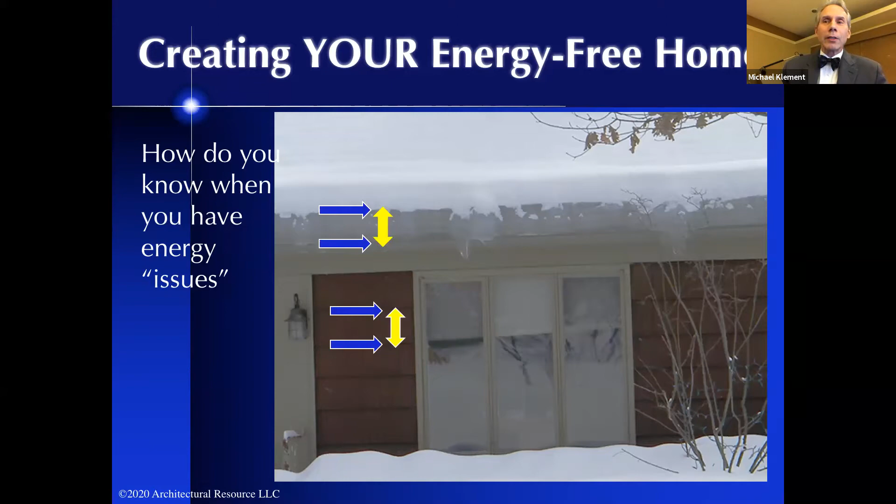Those striations are seamed at 12 inches. That means that that ice dam is taller than 12 inches. That's a clue that you might be having energy issues. This is also a clue that you might have infiltration issues.

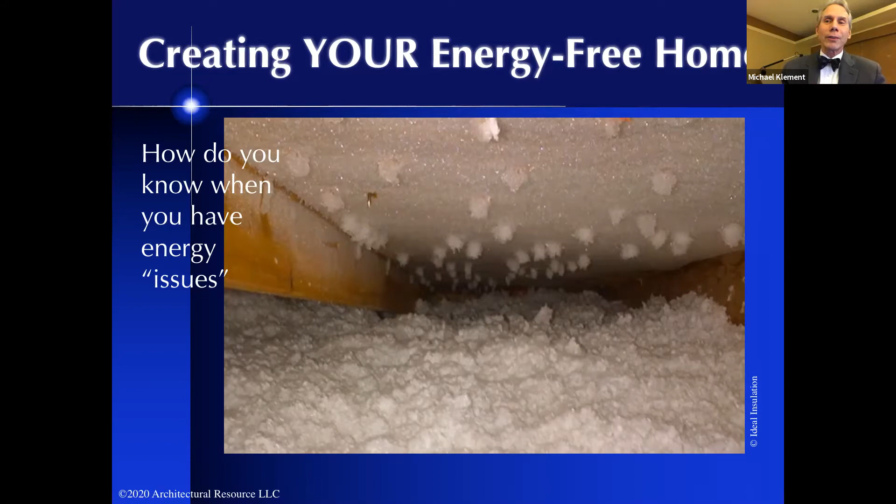This is also a clue when you climb up into your attic in the middle of winter and you're not sure which side is up and which side is down because the frost looks an awful lot like the powdery white insulation, the loose fill fiberglass. That's an indication, but how you really know is when there's not even bad weather and you're seeing things like this that resulted from what happened last winter. And the final check is, of course, your energy bills.

So where do you start? Here's where you start. Tonight, we're going to be laying out the path to a net zero home. And it starts with CUG: conservation, utilization, and generation. We're going to be looking at those in that order because that is the sequence. The most important thing is to make sure that you manage in this sequence. Otherwise, you're going to be throwing good money after bad. So let's have a brief conversation here on the fundamentals of energy so we have common ground together, all right?

So, temperature. Basically, temperature is vibrational kinetic energy, the motion of molecules. And what you'll hear discussed in a lot of energy conversations is something called delta T, the difference between the temperature inside the envelope and outside the envelope. We move quickly from temperature to conversations about humidity. Humidity is the content of moisture in the air, measured in grains of moisture. There's absolute humidity and relative humidity. It's important to know the difference between these two.

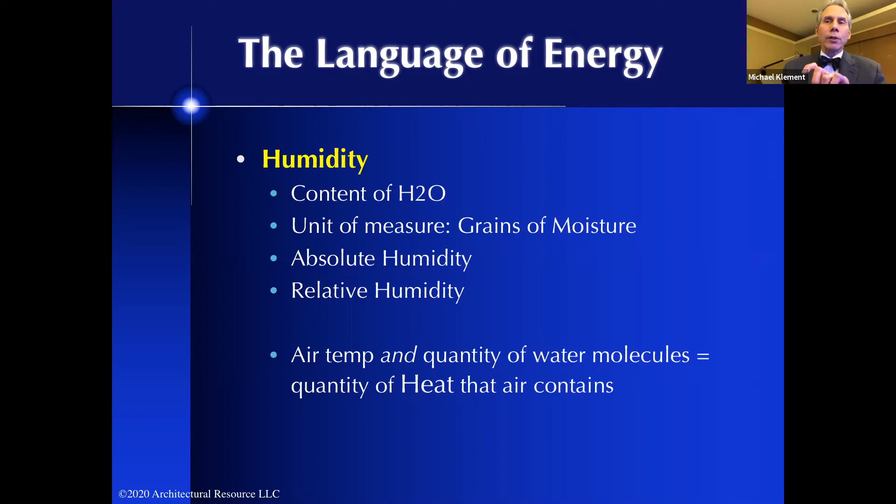Temperature is how — I just went backwards. Hang on a second.

There always has to be a little technical stuff going on, otherwise it's not a Zoom meeting, right? We're learning that. Heat.

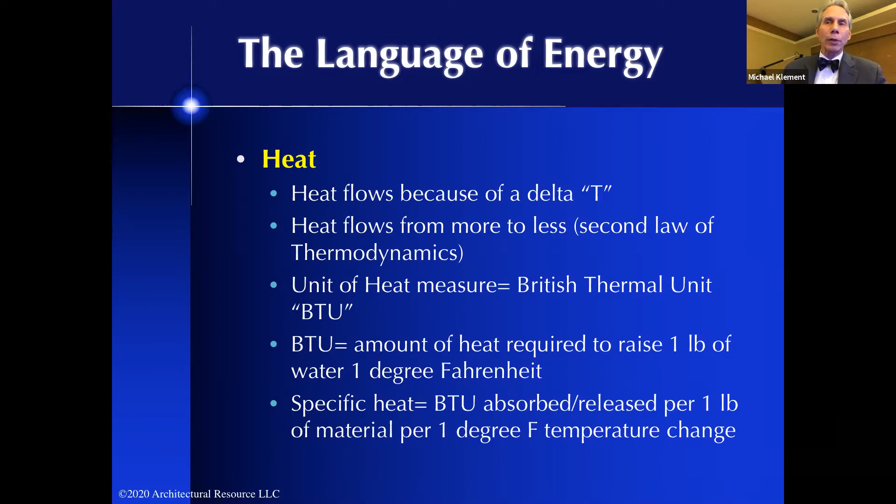Heat flows because of a delta in the temperature, more to less. So I often ask this question of people: heat goes up, right? We think about how, if you're inside your house on the second floor in the wintertime, the heat's going up. Well, heat doesn't go up, buoyant air goes up. Heat moves from more to less. And it's important to keep that in mind, because when we're creating a net zero energy free home, we're being completely on top of the heat flows through the building. It's a very, very important feature.

A BTU, or a British thermal unit, is a measure of energy, and that's essentially one blue tip kitchen match. It's what it takes to move the temperature of 1 pound of water 1 degree Fahrenheit.

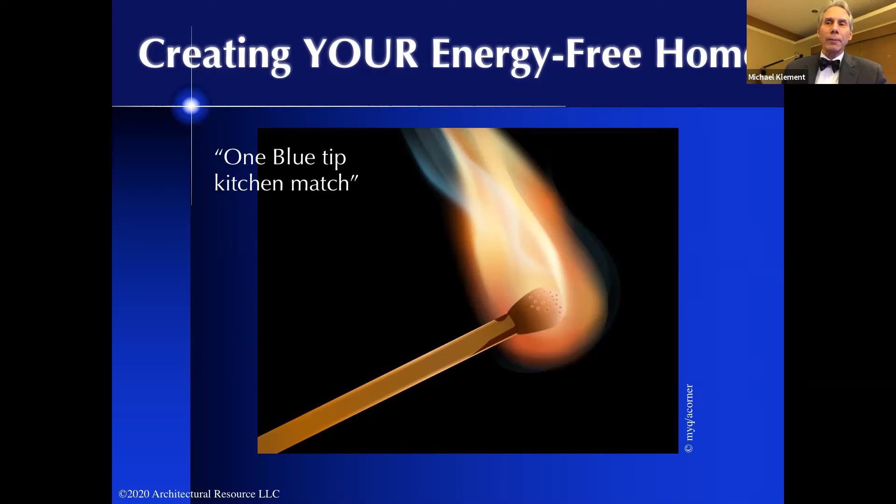All right, so things are going to be giving me fits tonight. I'm going to just do this.

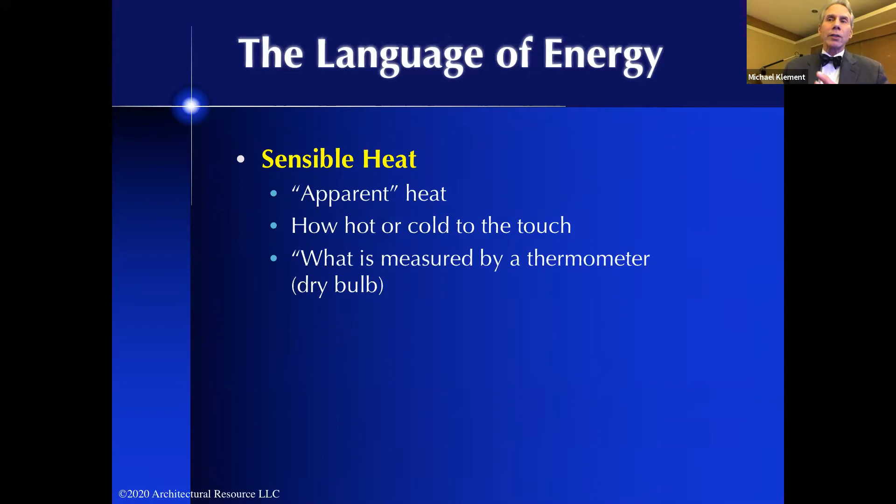Heat has two aspects. Sensible heat, this is the apparent heat. This is how hot or cold something is to the touch. This is what you measure by a thermometer, dry bulb. But there's another aspect of heat which is very important in terms of building performance, and that's latent heat, or hidden heat. This is what we think about when we have what we call phase change material. So when we have something going from a liquid to a gas, there's energy that needs to be absorbed to make that happen. The same thing happens when it goes the other direction.

I want to get into a brief conversation of energy versus power. Energy is the capacity of something to do work, and energy can exist in many different forms. We're going to be talking in particular about heat energy and electrical energy. Heat energy is measured, as we mentioned earlier, in BTUs, or British thermal units. Electrical energy is measured in kilowatt hours, and that's the expenditure of 1 kilowatt across 1 hour.

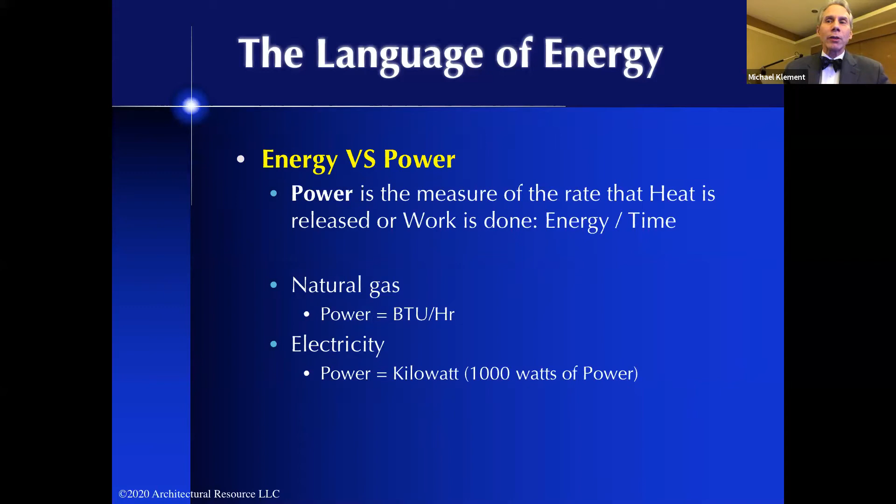To get it even more confusing, power is a measure of the rate at which heat is released or work is done. So in natural gas, we look at BTUs per hour. In electricity, we look at kilowatts.

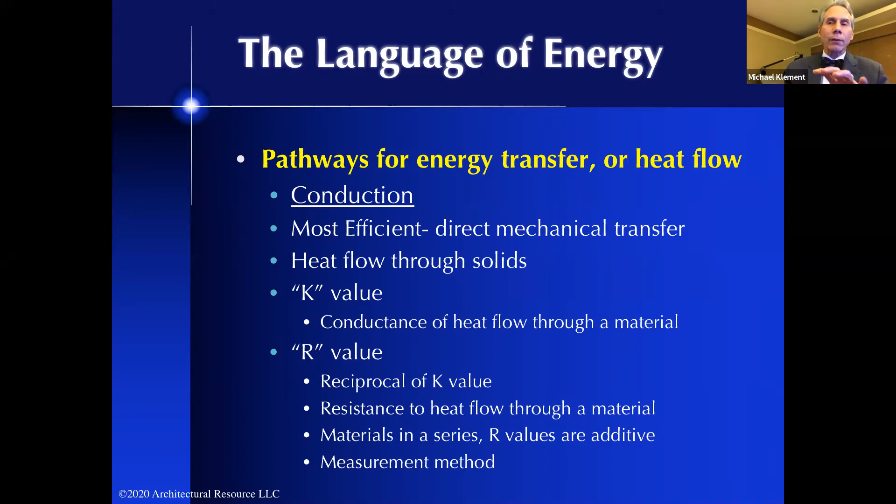Now we want to tackle the pathways for energy that moves across the building envelope, or heat flow. There are three principal methods we're going to be looking at. One is conduction. Conduction is a mechanical transfer of energy. It's heat flow through a material directly to another. We look at either K, the conductance of heat flow, or R, the resistance to heat flow. A higher R value has a higher resistance to heat flow, and that's a good thing. When you make your breakfast, if you're frying an egg, that's a perfect example of conduction. From the pan, the heat is being conducted directly into the egg, causing it to fry.

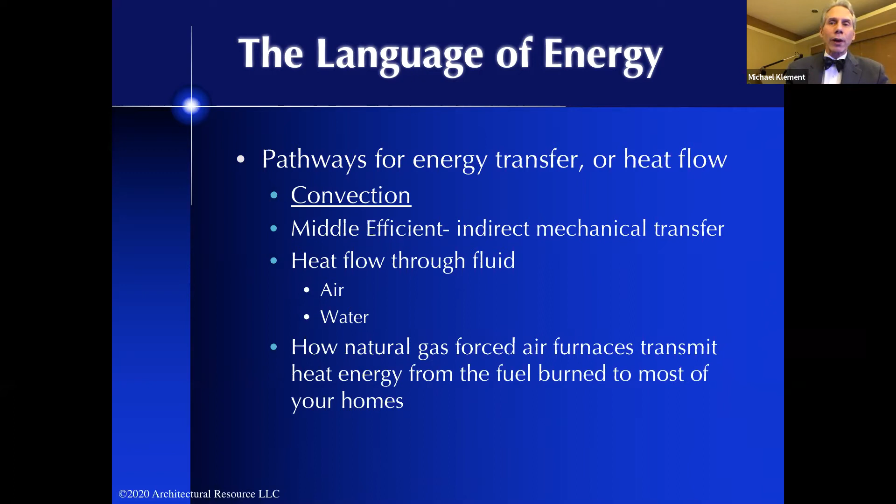The next measure of energy transfer is convection. This is the middle efficiency energy flow, through fluid transfer, air and water. If you're having that same egg for breakfast and now you're blowing on your coffee, you are using convection as a way of cooling that material.

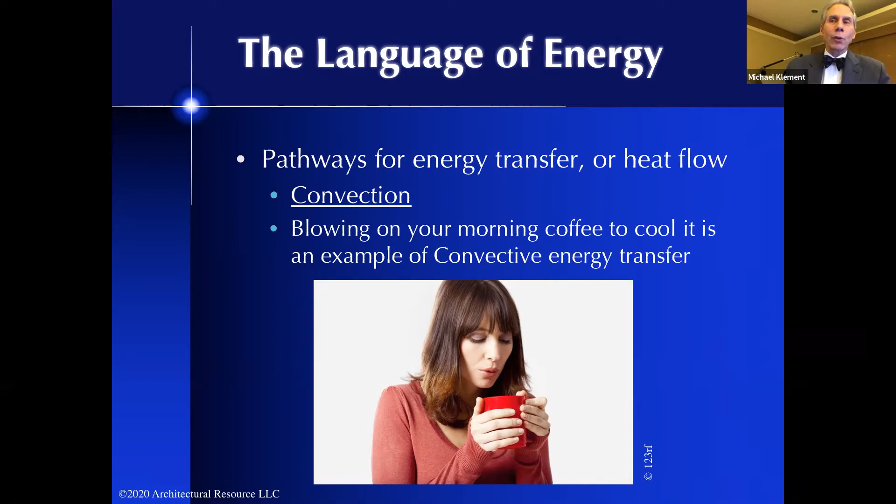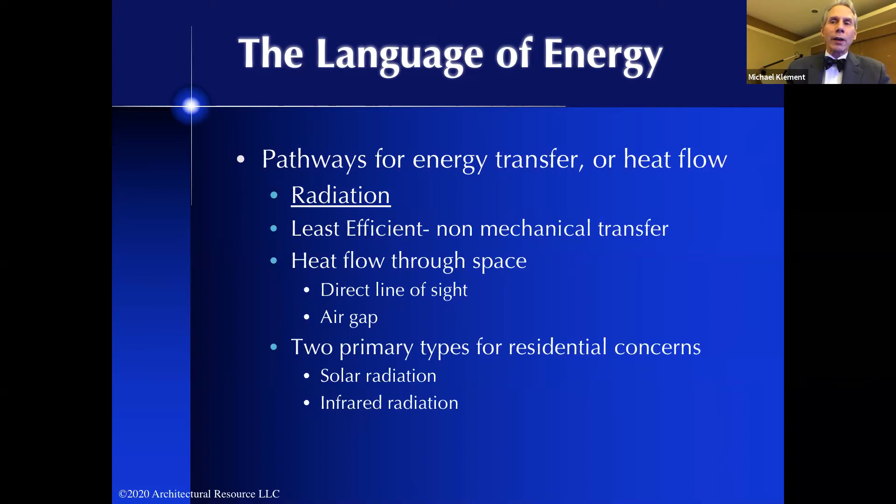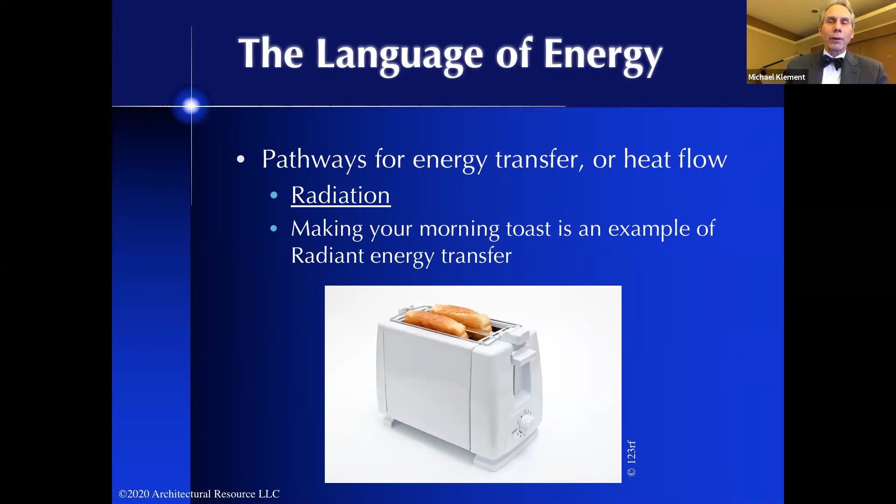Last but not least is radiation. This is the least efficient. This is heat flow in a direct line of sight through space. In our residential concerns, there are two particular concerns we look at: solar radiation and infrared radiation. So while you're busy eating those eggs and drinking your coffee, you also have a great illustration of radiation, because that's how you made your toast this morning, if you should happen to. So breakfast is a science experiment. Who knew, right?

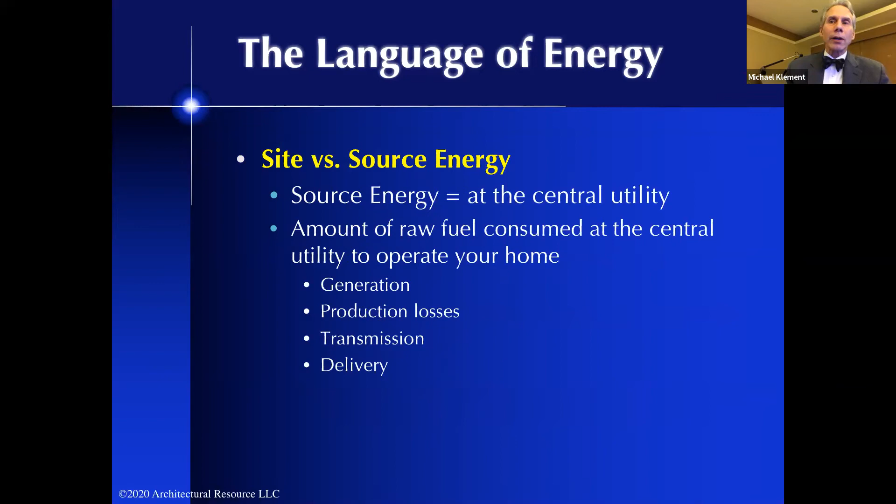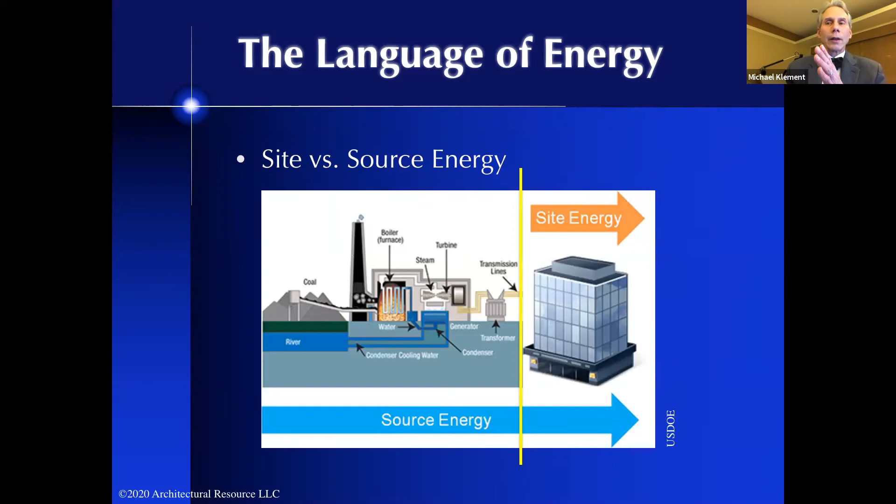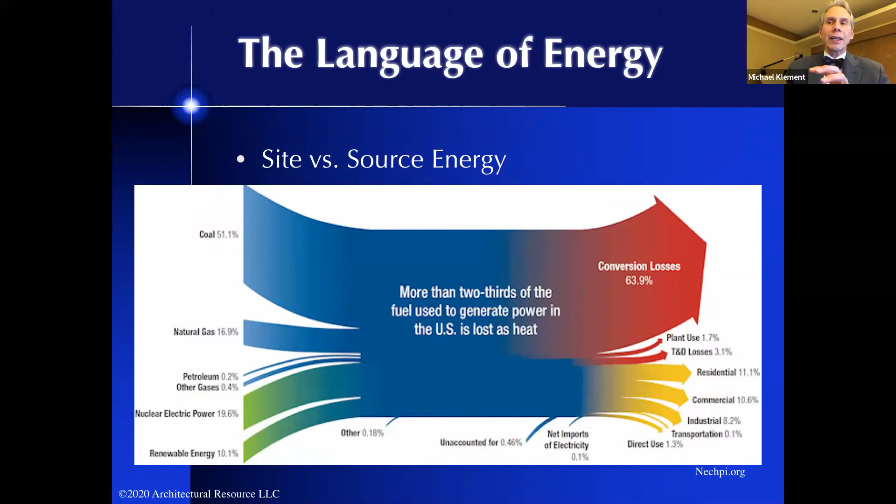So we're going to move now to talking about energy. There's a conversation in this field called site versus source. Source energy is what is consumed at the power plant to generate the power that comes to your house. Site energy is the energy that's used at the site. There is a big difference. When people talk about net zero energy, we have to discern whether they're talking about source energy or site energy. In this country, more than two-thirds of the power we're using is lost as heat before it even gets to us. That's like having your car derated by 30%.

Another concept we want you to understand is energy use intensity. This is a way to make a metric that can compare any particular building at any different size. We basically look at the BTUs per square foot per year. A typical home has an EUI of, call it 68. A passive house, which we'll talk about in part two of this two-part series on creating an energy-free home, has an insanely low energy use intensity of roughly 12 and lower.

Now we're going to be moving into those three steps that we talked about to conserve energy: conservation, utilization, and generation. We're going to focus first tonight on conservation. We'll pick up utilization and generation at the next event, part two. These are the four aspects: human behavior, design, air sealing, and insulation. Human behavior — what are we talking about? This is America's weapon of mass destruction.

One of our good friends, Marc Rosenbaum, who's one of the leading experts in energy management, is fond of saying there are no net zero homes, there are net zero households. Our behavior and how we operate in our homes has a huge amount to do with how efficient our home could be. You could have a super energy efficient home and drive it into the ground and lose some of those efficiencies we're baking in there.

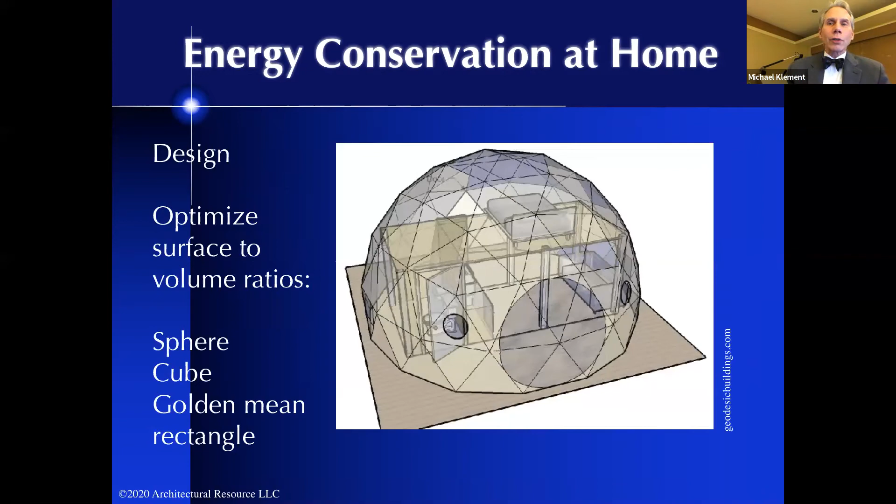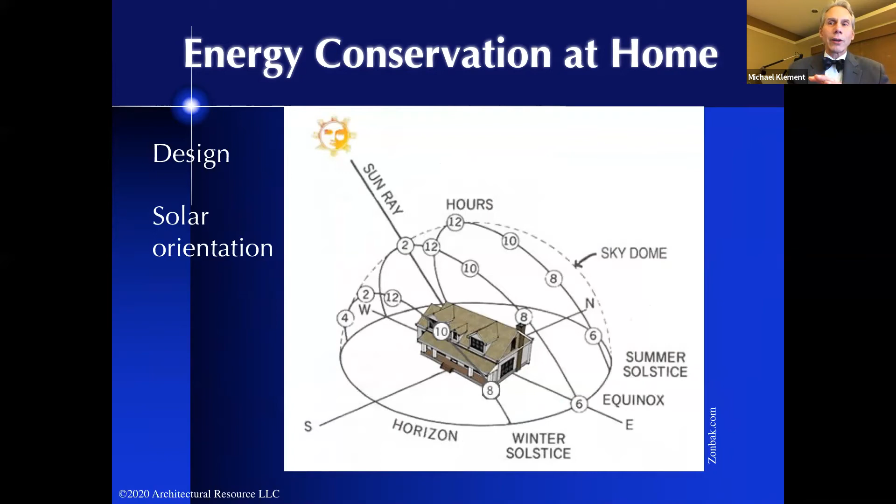What we're also looking at is optimizing the surface to volume ratio. We want to try to minimize that surface area. We also want to look at the solar orientation, because the sun's energy is free energy we can take advantage of. Once we've done human behavior and design, we now look to air sealing.

Air sealing, if you notice on that list, comes before insulation. This is like having a parka, but having it unzipped. Like we see a lot of students walking around campus with these great parkas, unzipped.

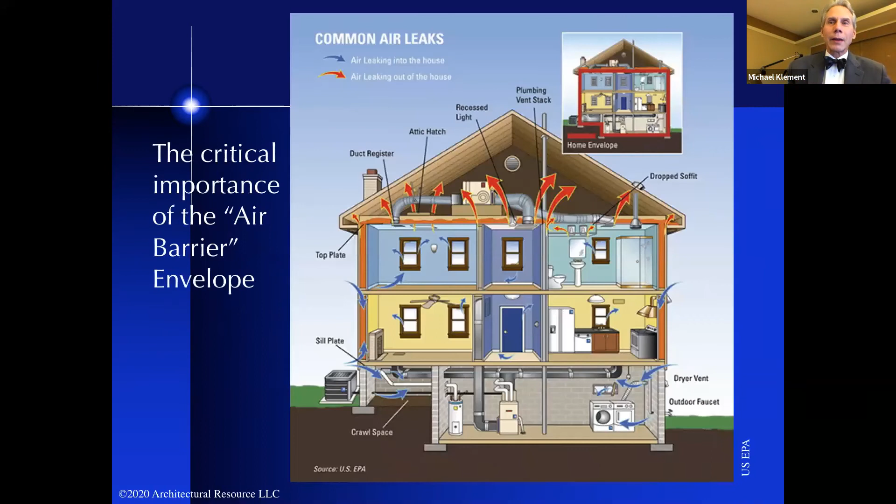They've got a convection energy issue going on. This is something we call the air barrier, and this is what separates the inside of the home from the exterior of the home. Air sealing becomes super, super important.

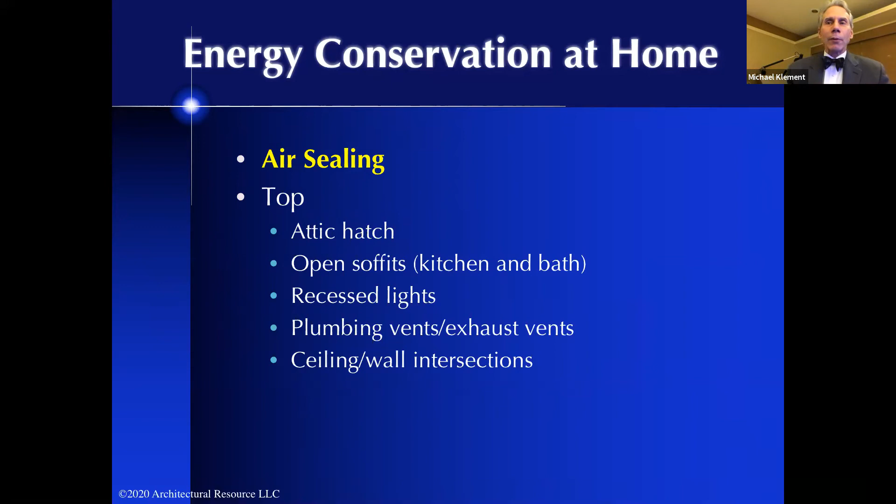What we look at is the 3 pressure zones of the house: the top, the bottom, and the middle. We want to seal these to prevent air from leaking up into the attic. Remember how we said that warm, buoyant air moves up? Well, moist air actually is more buoyant than dry air.

This is the concept we want you to understand in terms of the neutral pressure plane. Air comes in at the bottom of the home, goes up, and exits through the top. So if we want to prevent that, we want to focus on the bottom of the home and the top of the home.

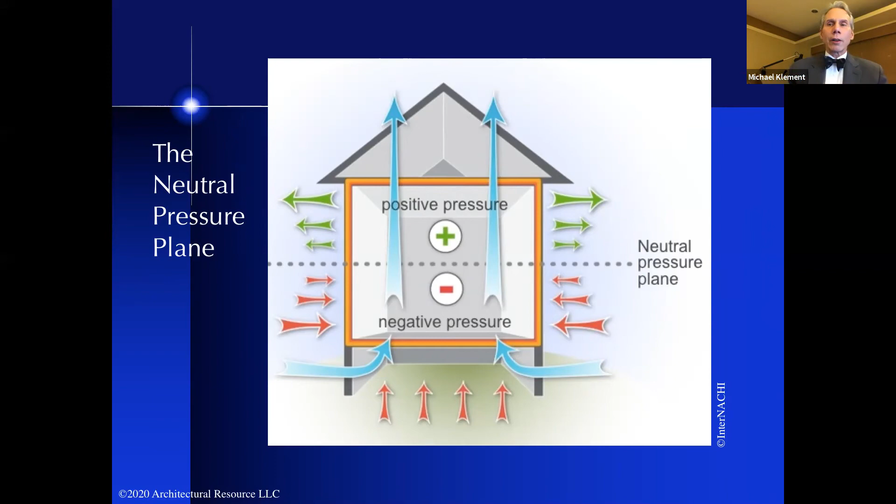The bottom of the home is usually an area we call the band. The top of the home is what we call the lid. Once we do those, we can move our focus into the middle. But we want to start first with the top and the bottom.

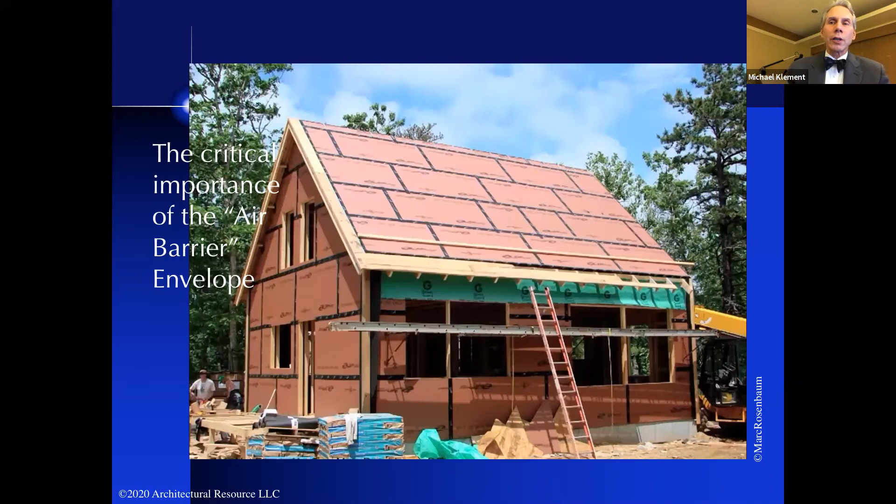When we're doing a high performance home, this is an example of a net zero home designed with Marc Rosenbaum's assistance. You can see this material completely enclosing the house is something called zip sheathing, and that air control layer goes around the entire home. Basically, it's like a balloon.

After we look at human behavior, design, and air sealing, only then do we look at insulation. This is the order we typically suggest putting our attention.

We first start at the roof, then the walls above grade, then the walls below grade, and last, the windows. That's the sequence we're finding gets good performance.

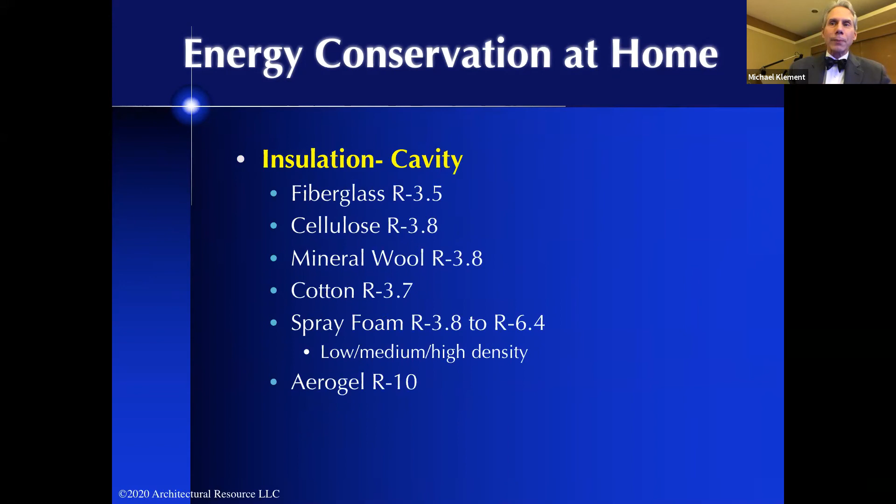In cavity insulation, there's a myriad of different things we can use, but what we're finding is the key is not so much the cavity insulation, but the insulation that goes around the exterior, what we call the shell.

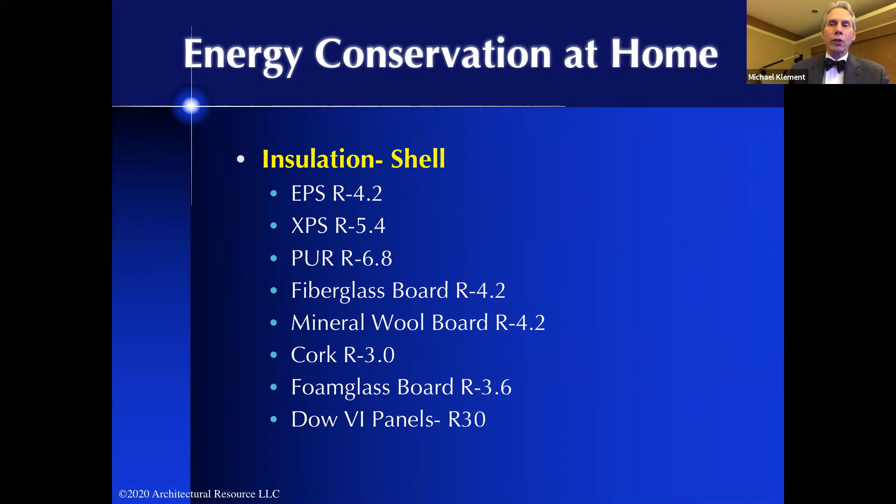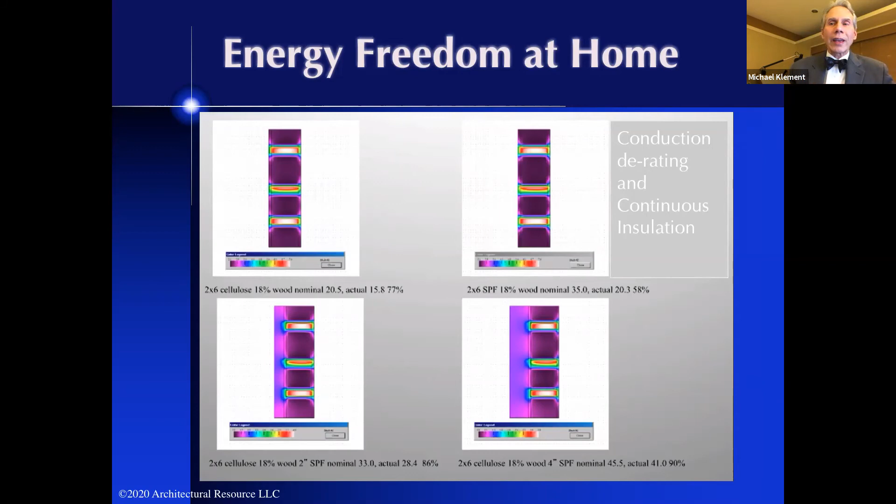Its actual R value is only 15.8, or 77% of the nominal R value. If you drop down to the slide directly below that, that's that same wall with 2 inches of exterior insulation, and that has an R value that's only off by 86% of its nominal value. So this idea of using continuous insulation is exactly the way to go.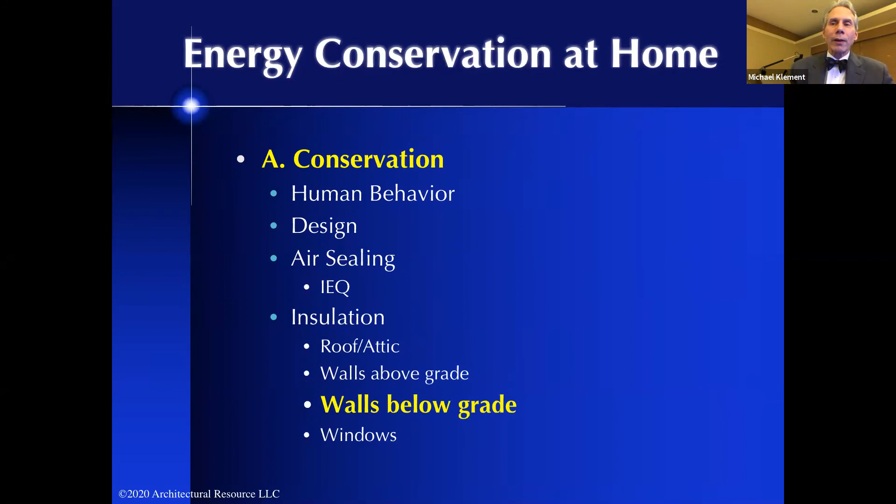So we're going to focus on the roof. We're going to focus on the walls above grade. We're going to focus on the walls below grade. And then we're going to focus on the windows. That is the conservation strategy that we take.

At Architectural Resource, we feel that there are 3 key steps to creating your energy-free home, and they look like this. The first step is us meeting with you and exploring what might be possible inside of your whys, what you're trying to do. The second step is to unify this into a cohesive design solution. And then the third step is to map out the how—how exactly will this happen, how does this all come together?

And I'd like to have my colleague, Gary Kade, join us and say a few things, if he could, from his mileage as a builder in the high performance building realm. Yeah, hi Michael, really great job on the energy efficient home tonight.

Michael's asked me to share some thoughts from a builder's perspective. I've been building for close to 40 years now, and what I've noticed about us builders is we're very slow to innovate. We really like doing things the way we've always done them. And the problem with that is we end up building what I have termed BNOs—a BNO is a brand new and obsolete home. It's pretty crazy when you think about it: invest all that money and literally have something that's brand new and obsolete.

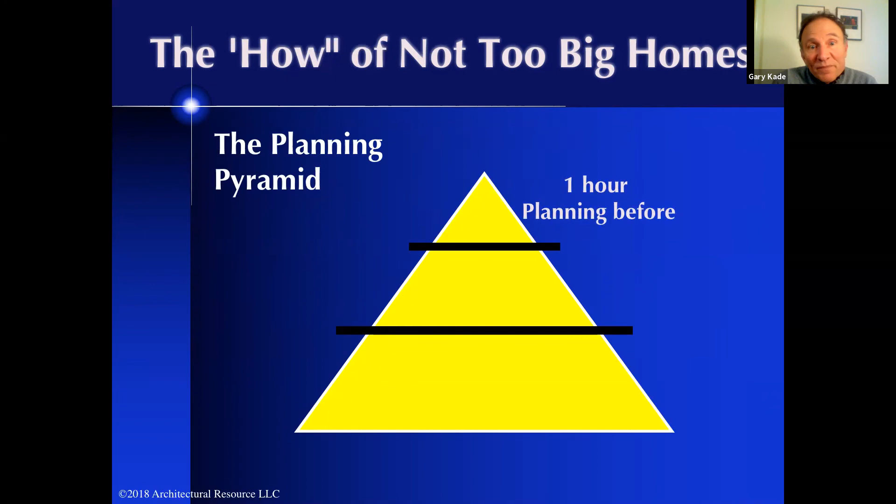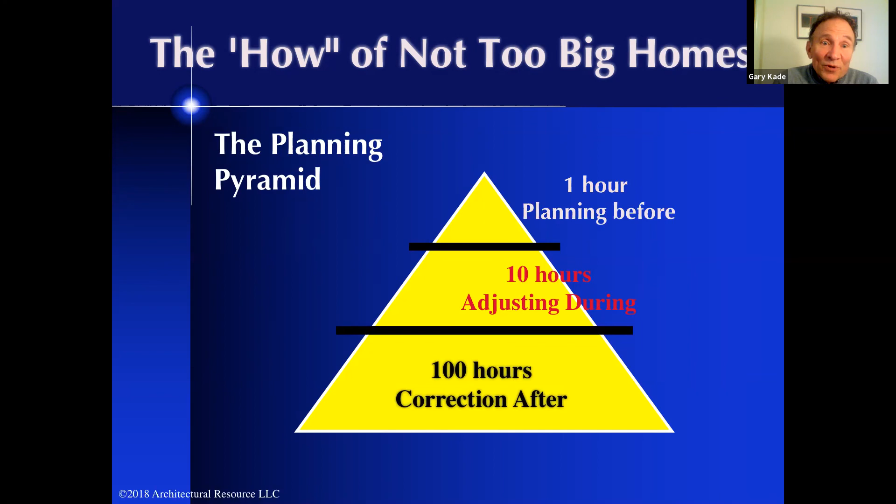And the future is definitely the net zero homes that Michael's been talking about. And planning is key—we have a planning pyramid. First part is: 1 hour of planning before saves 10 hours of adjusting during, and 100 hours of correction after. In the building world, you could actually put dollar signs in front of all those. Without planning, you end up having cost overruns and big time delays. So anything we want you to take away from this evening is how critical planning is.

That's something I really appreciate about Michael and his team—how well they plan, and plan in a way that you're actually having a home of the future today, not something you have to wait for. And certainly you don't want to be building a BNO, a brand new and obsolete home.